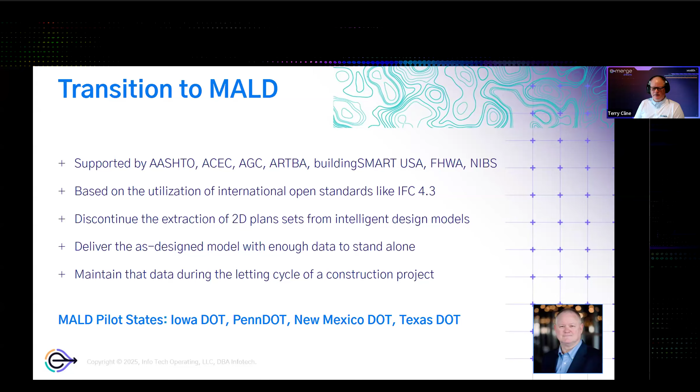At the bottom are a handful of the DOTs actively working on MALD pilots already. This map shows the latest information from the transportation pooled funds, showing which state agencies already have MALD pilots underway. Those in blue are agencies in the process of planning their pilots, and in orange are ones that have discussions underway to create the plan to perform pilots of model as a legal deliverable.

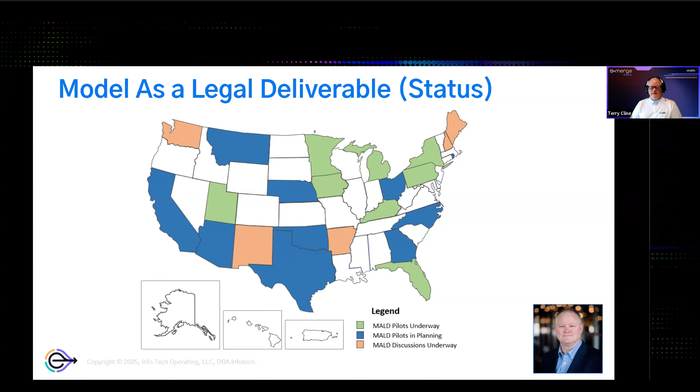Next slide, please. All right, so what are the challenges faced by the bidding process currently, and what is Infotech doing as the provider of bidx.com, which is, again, utilized by roughly 90% of all the US DOTs doing this type of work?

Well, the current process, as we said, is extremely dependent upon stripping out 2D plan sets from already existing models. At the bottom of the slide, I did a search and I summarized the results I saw from last year. I started on January 1 and went to December 31st, and I looked at all the plan sets that were downloaded from bidx.com. And there were 45,000 plan sets. And if you apply a very conservative number of 100 sheets per plan set, that's roughly 4.5 million sheets of 2D PDFs or TIFF files that were downloaded from bidx.com last year alone.

So if the goal of MALD is to do away with those plan sets, we've got some work to do, and this is what we're doing to begin to address that, and what we're seeing in the industry. There have been attempts at various agencies who've shared their experiences with us to use highly sophisticated, highly complex, highly expensive viewing technologies to attempt to resolve the model as a legal deliverable challenge. And the results that they're seeing are that it's hard to learn, it's time consuming, and that they needed a better solution to it.

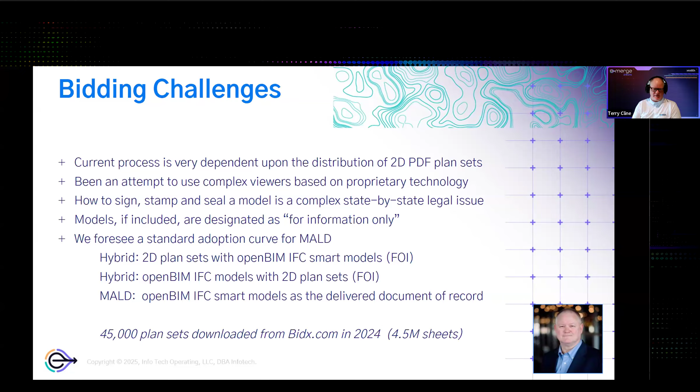Next slide, please. Okay, very good. So what does this mean for Infotech? What does this mean for our constituents, and what does this mean for the industry? When a proposal is advertised on BidX, it is often the first time the contracting community will see the details of the projects in that proposal. Currently, that could mean scouring through many lists of items and hundreds of plan sheets, like Terry was mentioning, sometimes all with the conclusion of, oh, this isn't actually a project that I would like to pursue.

As we move to delivering the model and we have more models on more projects and more proposals, we have the opportunity to really improve that experience for everyone. So first, like Terry was saying, these models already exist, right? They're using them to generate the 2D plans, and sometimes they're included already on the proposals even as for information only, but sometimes they're still in that proprietary format of the large design software.

And that is a barrier to a lot of individuals, and it becomes inaccessible to them, and they have to go the old way. So in the past, a prospective vendor would need to invest significant resources to either acquire that design software that has high learning curves just to see what's in the model, or just not have an opportunity to take that approach.

But much like how we've all become accustomed to working with PDFs, we should expect anyone to be able to open and view a model, and the editing still left to the design software, just as you would expect with a PDF. You don't edit PDFs generally. You leave that to Word or whatever else was the editing software. The same would apply here.

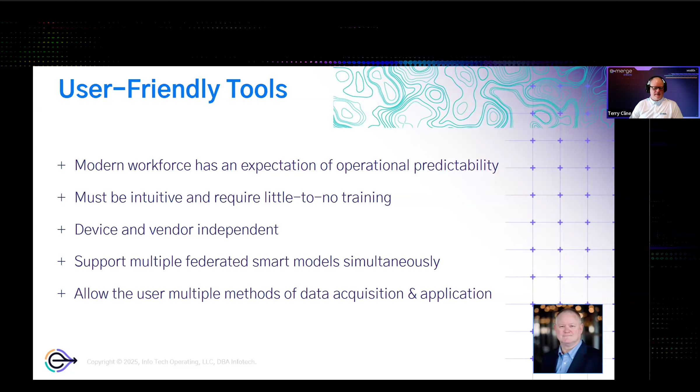All right, now I'm going to share my screen real quick. I have a short 4-minute recording of a new IFC viewer that is integrated into the bidx.com system that, again, is utilized by roughly 90% of all US DOTs. I'm stopping and starting this as we move forward. What I'm about to show you is already available in the online bidx.com.

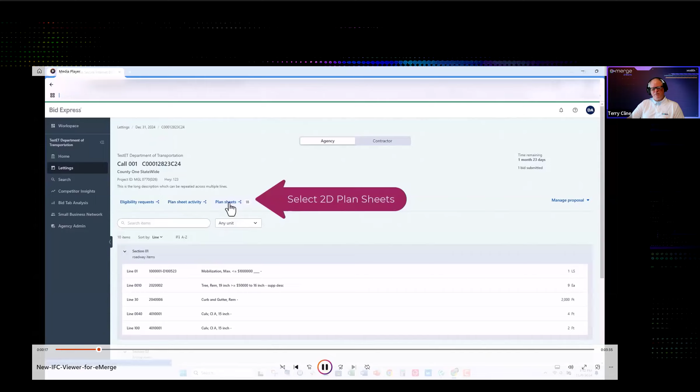You start by logging in using your account information. From there, you choose the agency where you want to go to a letting. Once you choose your agency, you'll see a list of letting dates associated with that particular agency. You choose your letting date. And then from there, bidx.com supports the process, if you choose to do it, of having multiple proposals associated to a single letting. In this particular example, there's just one proposal, but you would choose from that selection the proposal that you need to access. And then from that proposal, you would go into the plan room where you'd be able to access either 2D plan sets or 3D models.

In this example here, there are two different interfaces. One says drawings, one says 3D models. In my example, we've got nothing but PDF files, but anyone who's used bidx.com should already know that it supports both 2D PDFs and 2D tagged image file format TIFF files as well.

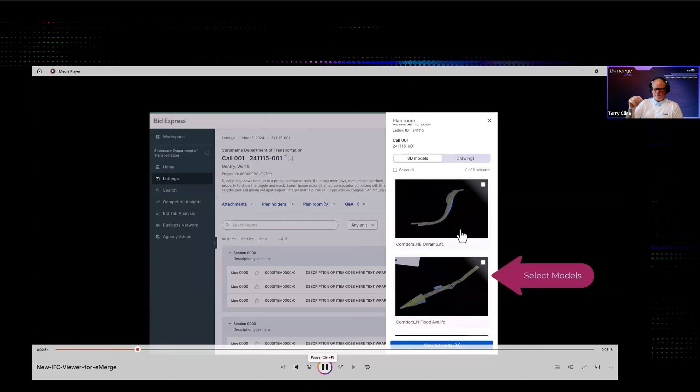To go to the 3D models, you simply select that tab. If in this collection of models there were 2 or 3 that you needed, you could selectively choose from that button in the upper right-hand corner and open just that subset, or you can go to the upper left-hand corner of the interface and you'll see a button that says Select All. And if you choose that button, you'll see it activates all of the federated models. And then at the bottom of the interface is the ability to open all those up simultaneously.

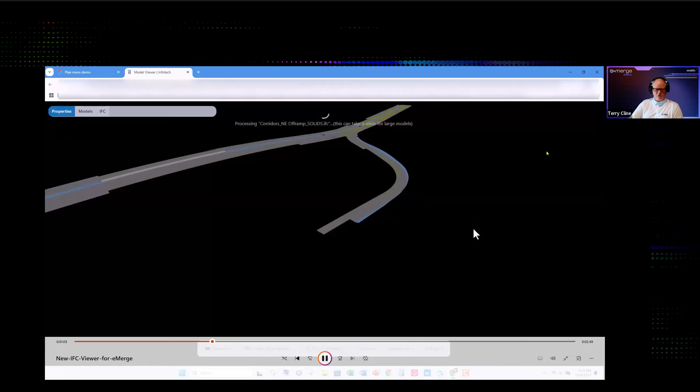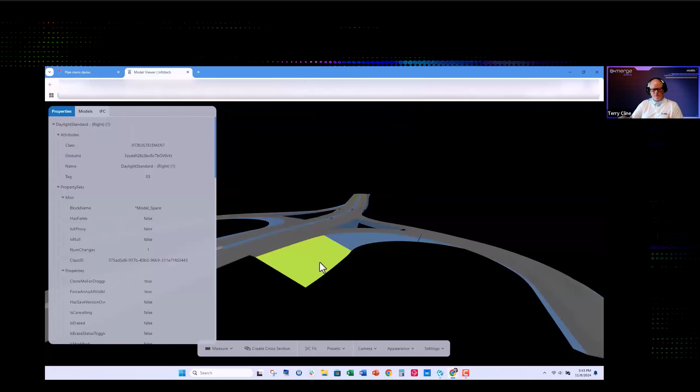Now, this video has not been sped up in any way. This was recorded live, and these are the 5 separate IFC files that are coming in from the bidx.com interface. As soon as it loads roughly 90% of the models, it will do that camera orientation move that you just saw, sort of a fit view orientation. And then from there, you're able to easily zoom around and select whatever object within the model you have any particular interest in. I'm going to slide that back just a bit for a second.

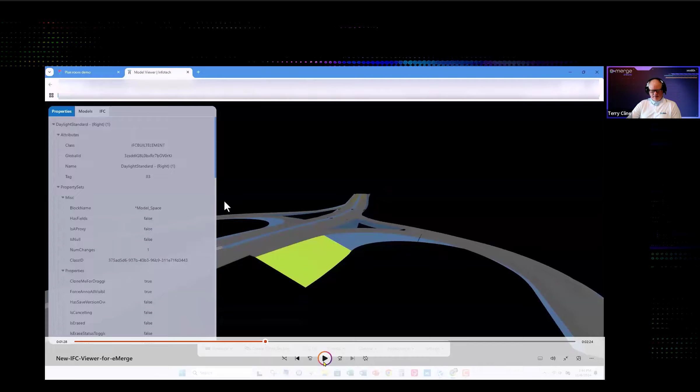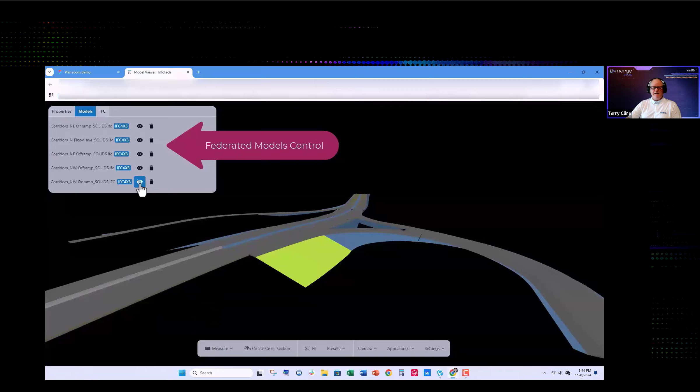So once you select the object you're interested in, that will activate the Properties tab in the interface to show you all of the data that was created when the IFC file was exported or created from whatever authoring utility you're using to create your IFC files. In addition to the Properties tab, there's a tab for models. You can see here the 5 separate federated IFC models that I'm currently working with. And any one of those models can have their display turned on and off by simply using that little eyeball icon.

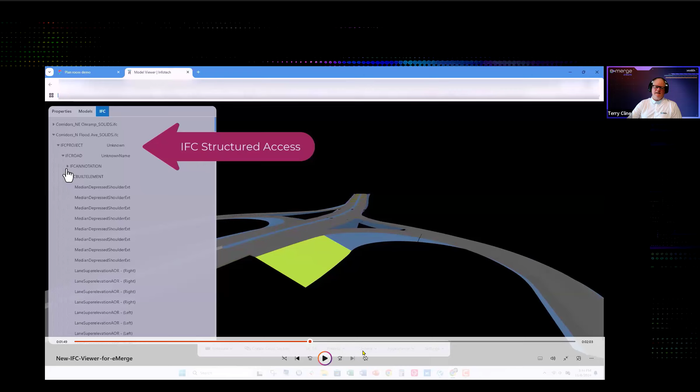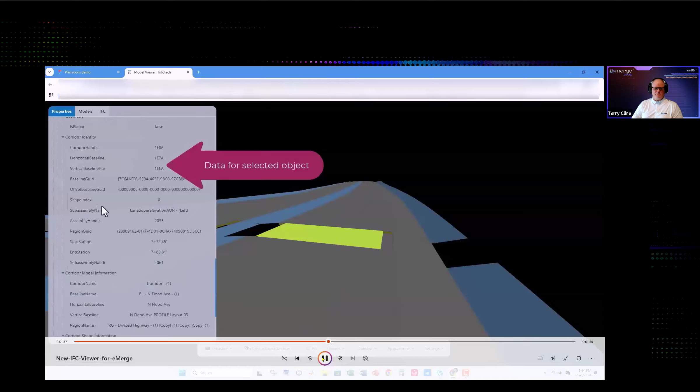And then lastly, in that interface on the upper left there is an IFC display. For anyone who works with IFC on a regular basis, it is very structured and has a schema of what particular data is stored in what particular location for what type of asset or item type. And if you're very comfortable working in that environment, in addition to being able to spin and zoom and selectively choose what you want graphically, we wanted to provide with this IFC viewer the schema support so that you could just scroll down and select the item that you're interested in, which will automatically zoom to it in the display window. And then if you go back to the Properties tab, you'll be able to see all of that data for the object that has now been selected.

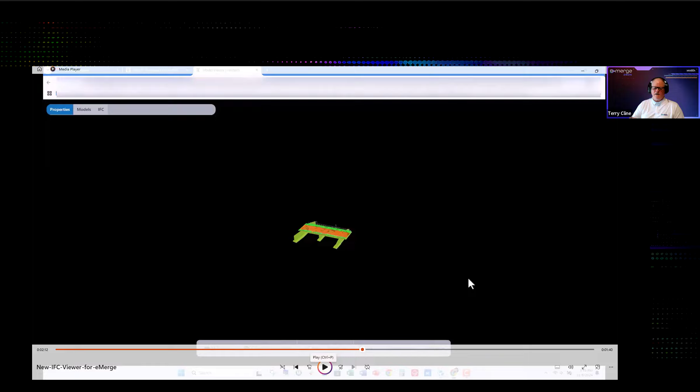Here we're loading a separate model. This is obviously a bridge IFC model as opposed to a roadway one. And I'm going to walk through some of the interfaces. I don't think you can see that, so I'm going to minimize that a little bit. One of the things you'll first see is the ability to change the display of units if you were to measure the model from metric to imperial, which I've just done.

And now what you'll see is an appearance option and a fit view capability, which simply zooms to the extent of the model itself. Under appearance, we have the ability to change it from a shaded model display to a wireframe, a triangulated wireframe, or you'll also see a button that says isolate. You could select any object within the model or multiple federated models and hit isolate, and everything except the selected item will disappear temporarily so that you can focus your attention on the object that you're working with.

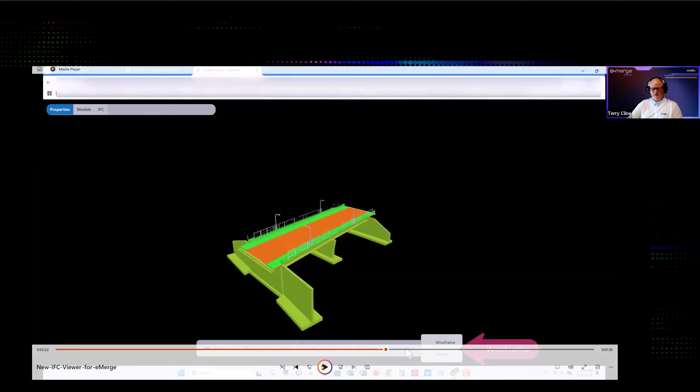So here we see the wireframe display, and then under camera, there's the option to choose between the traditional human vanishing point perspective orientation to an orthographic orientation if you prefer to work that way. And there's also multiple preset camera angles like top, bottom, left, and right to help you get yourself oriented really quickly.

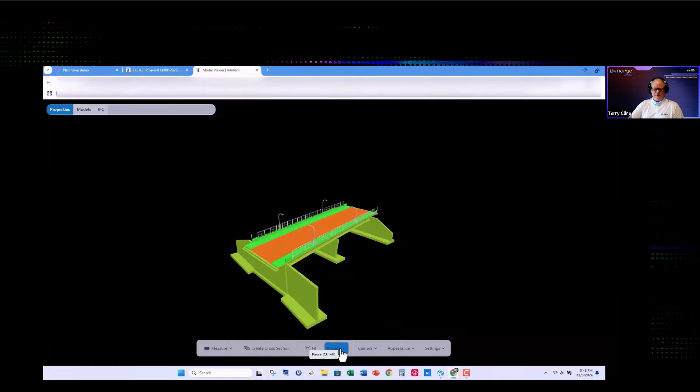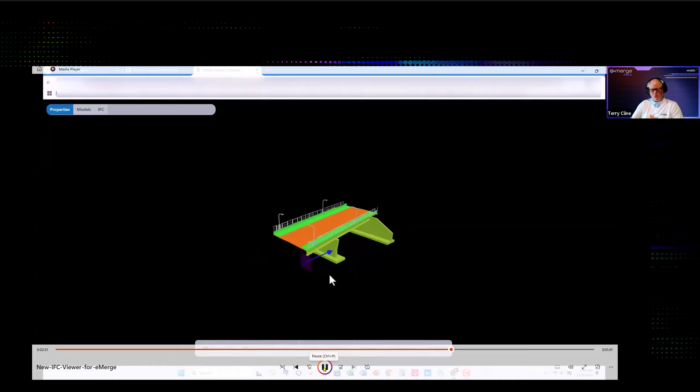Here, what I'm doing is I have selected the tool to do a cross-section cutting action, and I have chosen an existing object within the model to use as a defined cutting plane. And now I can simply slide up and down that blue arrow and move the cutting plane to any particular point within the model that I have an interest in seeing at that time.

And then lastly, in the video recording that I have here is the measurement utility. Currently, the utility has two different measurement capabilities. One is to do a length measurement, which you would be able to hit a point, and it would show you, in essence, the development of a polyline and show you the overall length.

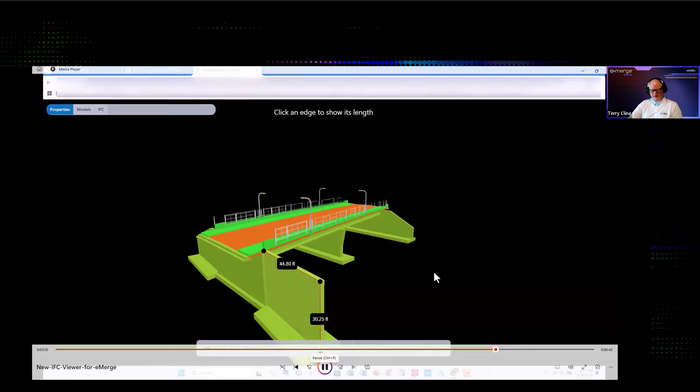And the one I'm using in the recording here is one called Edge, where you can simply choose that method and click anywhere on an object's edge, and it will show you the calculated length for that particular edge of that object.

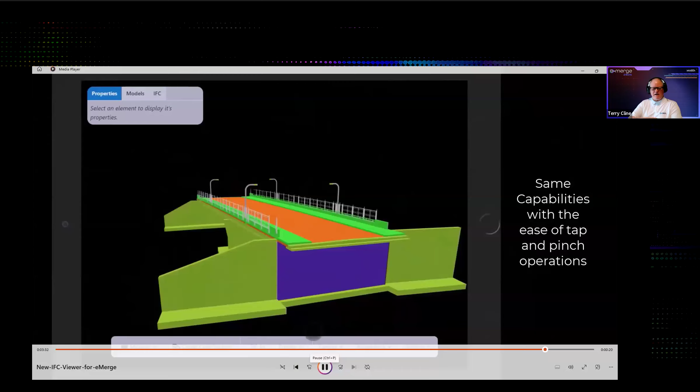And lastly, wrapping up the recorded video is to show that all of these functions that I've just showed in this recording work equally well and in an intuitive way, whether you're using a desktop machine, a laptop, or some sort of mobile device. Here, this is the exact same capabilities, including the ability to cut cross sections and perform measurements. Just simply using it on a mobile device works exactly the same.

And with that, I'll stop sharing. I will resume sharing. All right.

So there's a fun twist on a saying that we've been talking about lately. We say, if a picture is worth 1,000 words, a model is worth 1,000 pictures. Everyone wins when we start moving to models. It gives greater ability for prospective contractors to quickly understand a project and determine if it's the right kind of project for them. It improves communication between contractors and owners, which cannot be overstated in how important that is, because it can prevent issues and costly changes later due to misunderstandings between the two parties.

And beyond that, there's a huge benefit in moving to open data standards. If this model already exists, let's use it everywhere we can. Let's make sure we're keeping that model in open standards. Make sure that we're not redundantly creating that model, bringing it forward through the process, preserving all of that rich data that was created during design and into bidding and into construction. And use tools like BidX to have these higher quality bids and project outcomes, because these are products that are going to support models in the bidding process.